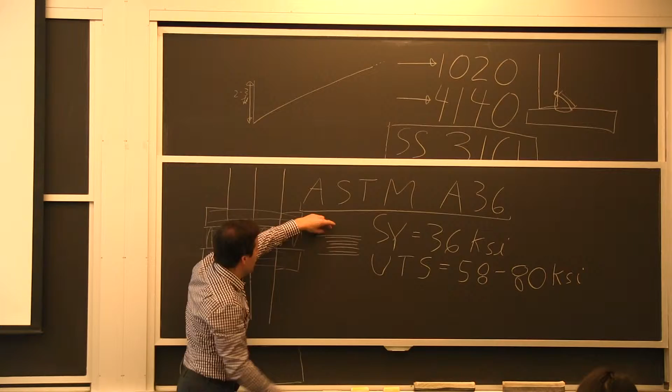If you want to think about it simply: with this tight connection that I've been trying to convince you is better, you get the load to go across this whole area, all the way from one nut to the other. If this isn't tight, and all I have is the bolt with load going into that portion and no contact on top, this is going to stretch a whole lot more, because you have less material.

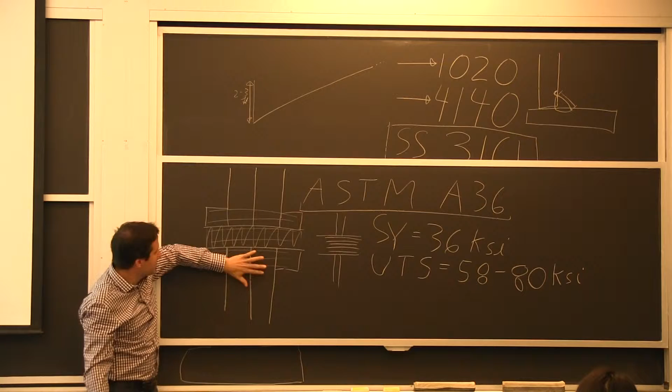So think about it this way: it's all tight, it's preloaded, it stays together, the contact stays here. The load, the line of load from pressure variations, external load, you name it, will go all the way across the full assembly. If it's disconnected a little bit, it will go through the fastener instead. This is going to be a much higher stress level, and therefore it will create more fatigue.

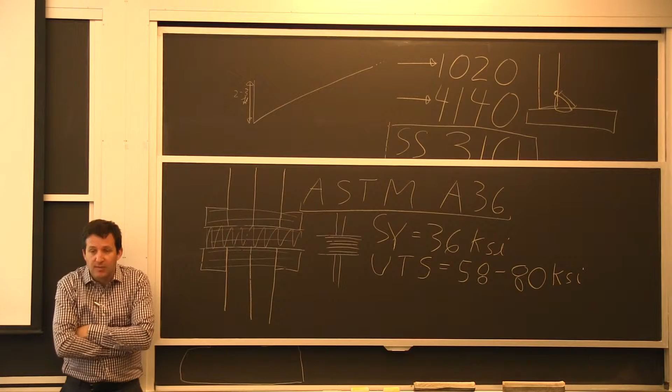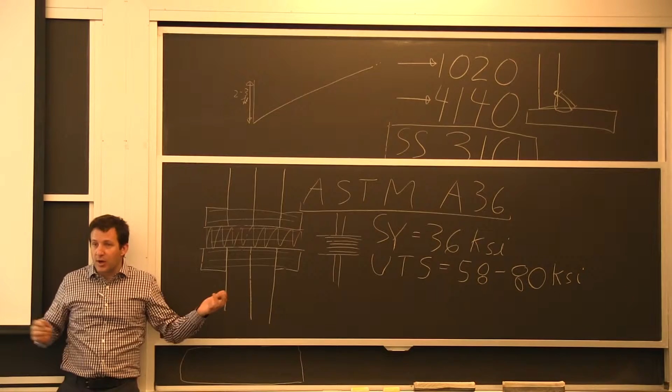So with fasteners, we really care about the initial yield strength, because that's what allows us to preload them without damaging the threads, without breaking them. That's the reason why SAE has come up with these very specific requirements, and everyone uses them. If you go to pre-stressed concrete cylinders and other structures that use very high strength steel, it's the same story - they tell you very precisely how to do it, because the consequences of a small variation are very important. The higher your performance criteria, the more likely you are to worry about variations.

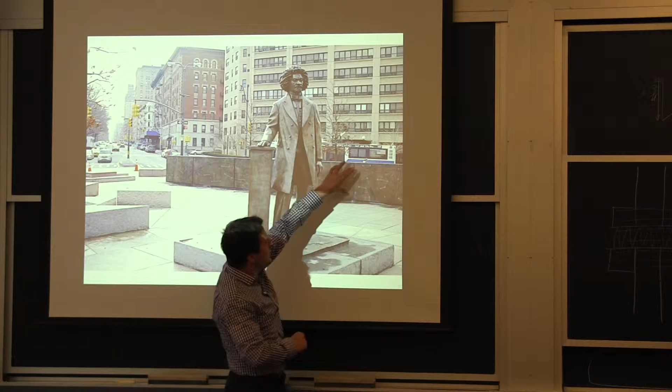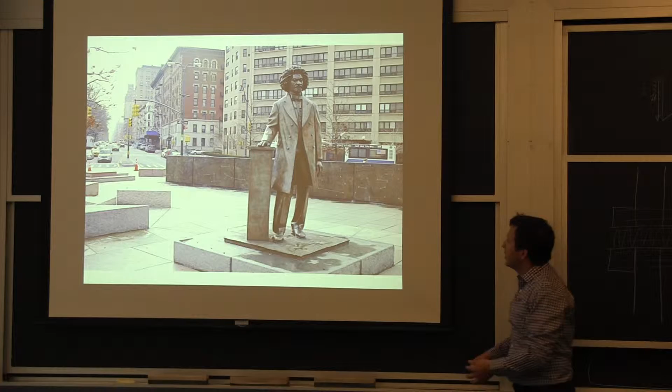This is a project that's very different. I worked in New York, so Central Park, this week, it was for the inauguration of someone - Mr. Douglass, I think, who made a very good contribution to the history of America. Anyway, the structure I was working on is this big tunnel that was a big wall fountain, with a very large pumping system to get the water to distribute along little holes and coming out very nicely. I actually have a video of it working at some point.

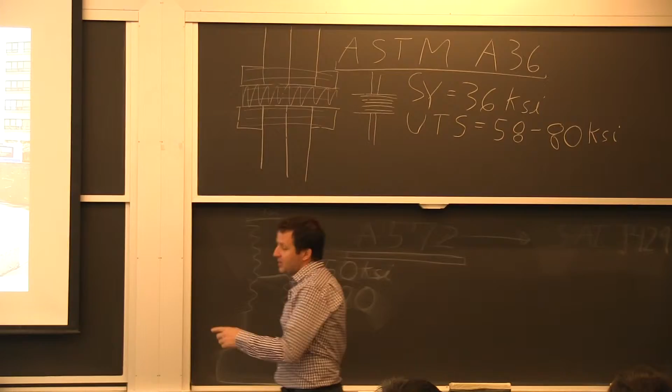The problem there is you're dealing with artists and general engineers, and they care about aesthetic more than they care about things not breaking. So the mistake they made was to focus essentially on the chemistry of the bronze. These panels were bronze, very nice, but they started cracking, big time.

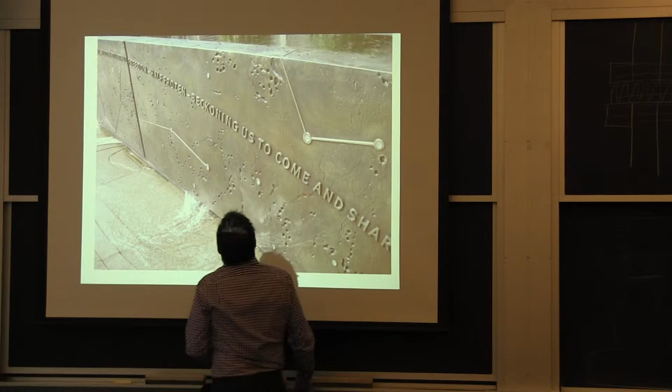This is a project at a company I used to work at. I don't have the file, but there were cracks going from here all the way to the middle of some panels. It didn't look good, and they had cracks also. These were ports for light systems, supposed to be waterproof, and it was leaking - all sorts of brazing and welding issues. The bottom line was the bronze panels, as they were built, were brittle. They couldn't take 0.5% strain.

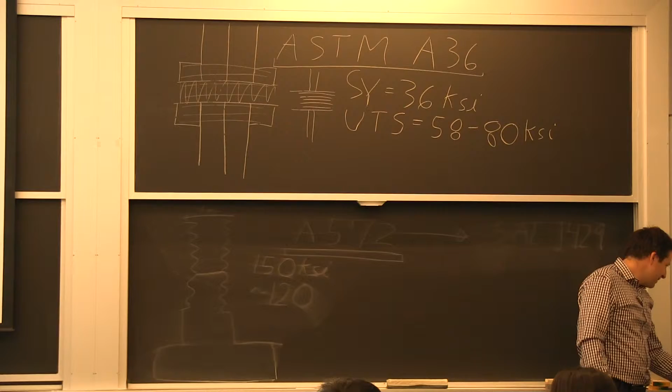That's nothing. Now, were they required to be deformable according to the engineer of record? Yes. Now, did he say so? No. All he asked for is a Copper Development Association number, and I don't remember which one it was - it started with a C, got 3 or 5 digits.

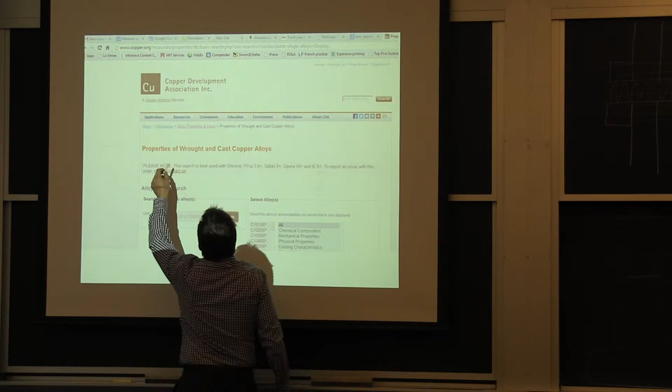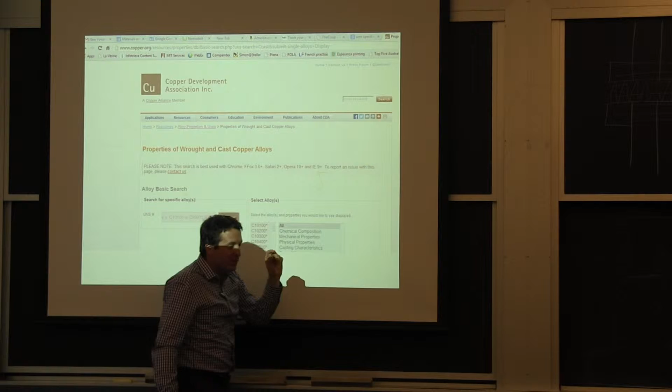If you want to know the chemistry he asked for, just go on their website to the section on resources. They have a section on specifications, okay, but where I am here, I went to resources and alloy properties and use. These are not minimum requirements. If you go through all the database, it just says well, maybe you'll get this - they call it typical values.

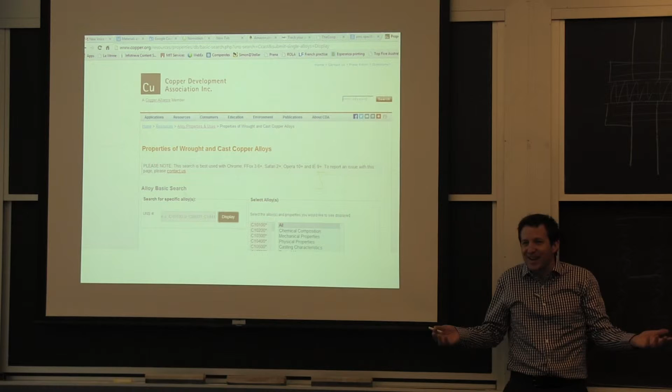With a casting, a typical value doesn't mean much because it will depend on how you cast it. Are you going to control the oxidation? Are you going to be doing investment casting? What exactly are you doing - sand casting? Are we looking at the core? Are we looking at the surface? What are we doing, what's our superheat? Everything will matter.

Anyway, it was a really sad story because when it's all done, a lot of times you can't just go back and do a heat treatment. If the casting structure is such that there's enough segregation between the different alloying elements, you won't be able to blend it all together. There's no black magic like we have with steel. You can deal with a lot of things - you can put it into solution, quench it again, and do what you want.

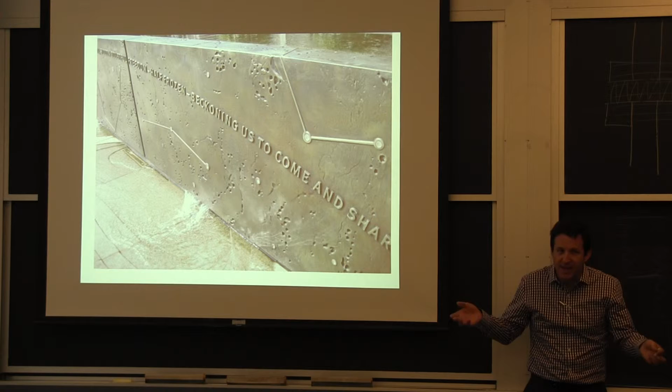In this particular case, you have to melt it again, but the molds they had were not reusable, they were one-time use. So the only viable solution I could offer them was to isolate every single panel as a piece with expansion joints so there's no stress on it, because the way they had it, it was brazed - this panel was connected to this one.

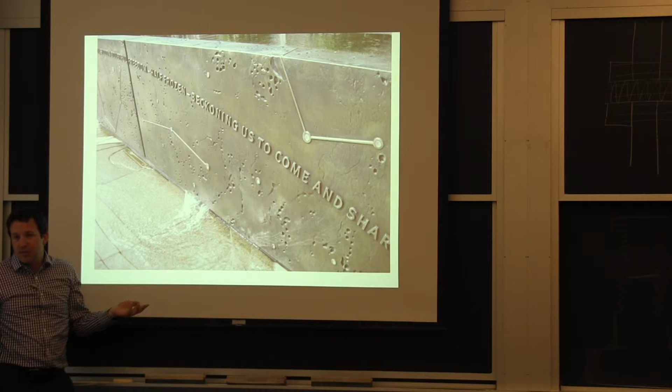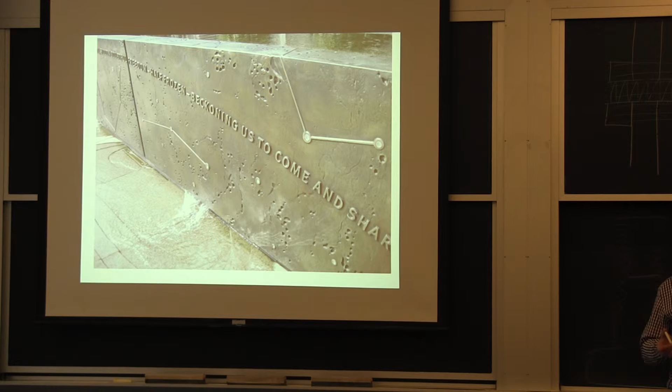And therefore, as a large structure with seasonal variation, you'll have a lot of mechanical load. So it's okay to have a structure that doesn't have ductility if it's only standing there by itself, but if you're going to go through settlement and seasonal temperature variation, they had a lot of issues. And there's this water on top, so it had to be sealed.

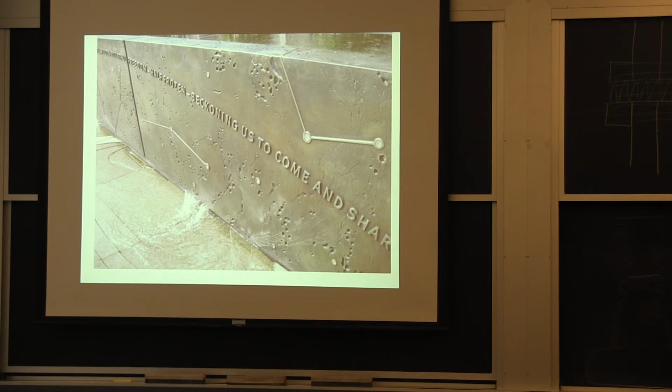I think our recommendation - I was working with a bunch of structural engineers, and some of them would just redo it, but my take was we could take it down, re-engineer the joints, and be able to use those panels. But as is, it was just a big mistake altogether, and they were missing deadlines for inauguration and everything that comes with a project.

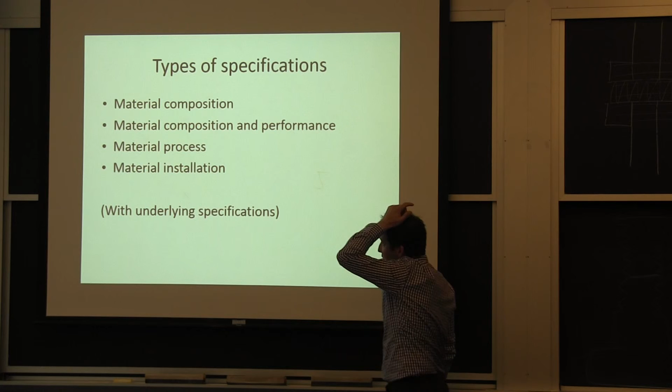So I hope I convinced you of the different levels of specification: the material composition, the performance, the process. I showed it mostly with the bolts. Material installation, we don't have time - I'll cover that briefly tomorrow.